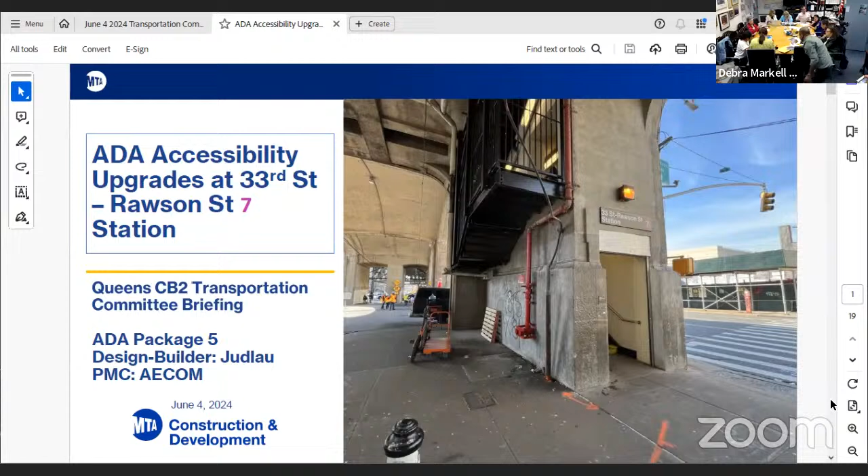I'm going to hand it over to Connor. Oh, she'll begin. Oh yeah, we also have paper copies, because we are anticipating. Just in case there is a question. You should be able to magnify your screen. There's a couple more than here. I need some. Sorry, one moment, thank you.

Oh, so now it's really okay. I gotta share it again. Yeah, no, I know, we're having some technical issue. The sharing works fine, it's the computer. I don't know if that's to do with AT&T, but AT&T just went down. Okay, great, so we'll just see. You can minimize the side window if you want. No, that's a little not flat, yeah. That's not me. Oh, that's us. Yeah, that's our sign. Oh, you can move this one? Yes, up a little bit. Yeah, yeah.

Okay, so my notes are pulling up, but I will just begin. So hello again, thank you so much for your time. Again, my name is Connor Irvin. I'm representing MTA Construction Development. I'm here with Megan and of course folks from our PMC. So thank you, we're presenting two stations here.

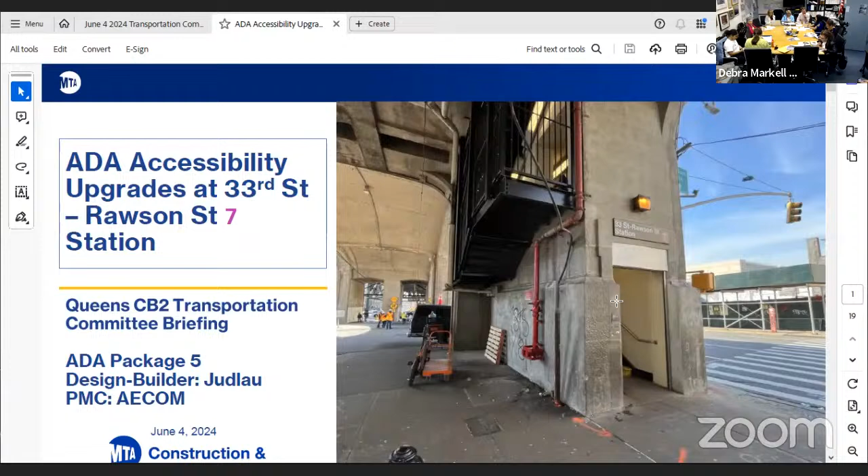Okay, great. So to dive into the project scope here. So for ADA improvements, we have a number of them.

We have 2 new street to platform elevators serving both sides, Manhattan and Flushing bound. 2 new street to platform stairs, again in both directions. 4 mezzanine stair replacements in both directions. And we have a new ADA raised boarding area on each platform, as well as a new platform edge tactile strips along the length.

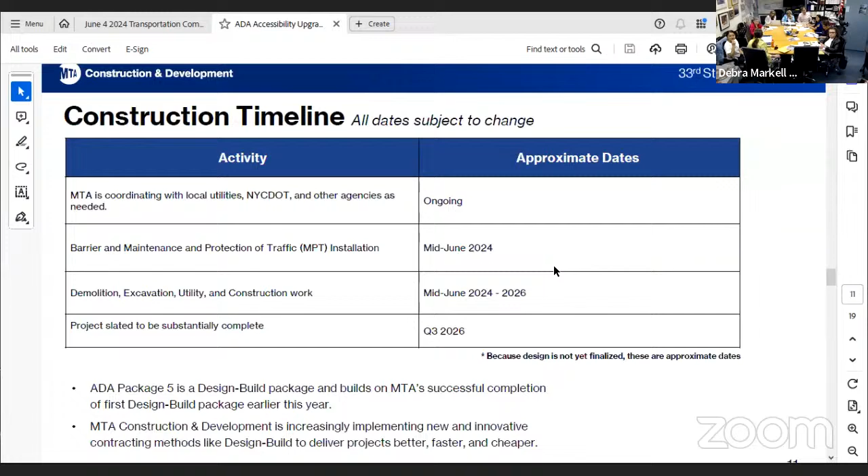So for infrastructure improvements, we have 2 new street level head houses. Those will include new fare control areas that will lead from the street up into the platform. We are also extending the platform canopy. So in order to make room for the elevators, we're going to be... stop sharing.

We anticipated this problem though, so don't even worry about it. Yes, Maureen, thanks for joining. Don't worry, I'll keep going if everyone has anything, we'll put it in the chat.

No, we're on the scope now. It's ahead a lot, we're on the first page. Okay, great. I'm waiting, I haven't... okay, come on.

To make room for these elevators, we're going to slightly extend the platform, so that will also include an extension over that area. Also going to be improving lighting in the station and some fire alarm upgrades.

And whenever we make improvements like this, we usually also touch the back of house space. So we're going to be making some HVAC upgrades to the back of house area where our employees sit.

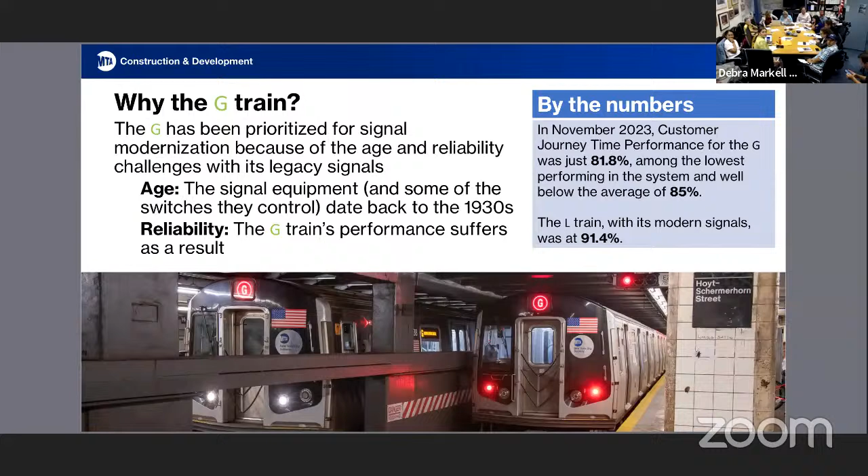So why the G train? These signals are from the 1930s, really, really old, from the FDR administration. They're really beginning to show their age, as train riders know. We've completed CBTC on the 7 and the L, and that dramatically increased their on-time performance. We're really excited about bringing the same benefits to the G. Yep, thanks.

So the scope is along the entire 11.4 mile line. It's a really big project made up of a lot of complex moving parts. As we're installing the signal equipment, we're making the service outages as well, and we're replacing a very, very large amount of track, 30 miles of track. We're also upgrading the big switches, which allow the trains to move from one track to the other.

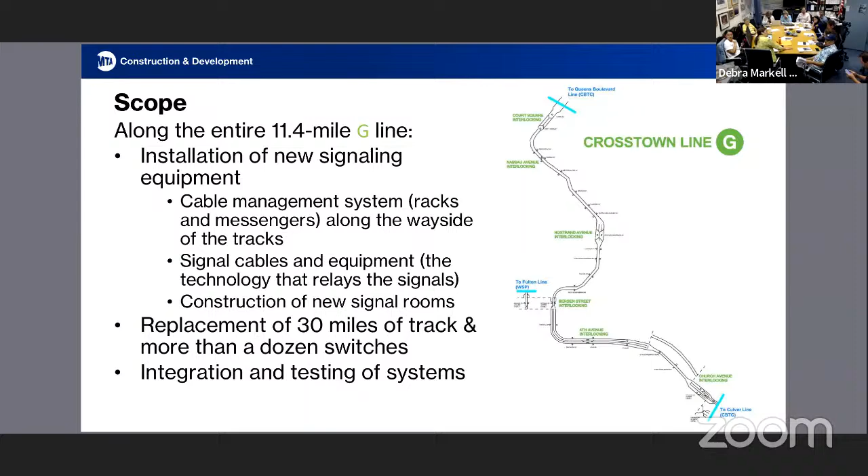So as I said, when we were talking about the ADA projects, this is a design build project. This really symbolizes not just the way of modernizing our physical infrastructure, but how we're executing these projects better, faster, cheaper. This is our very first design build CBTC contract, and again, it brings on the builder earlier in the process. It's helped us reduce back of house space and rely less on equipment installed directly on the tracks, which also makes it easier to maintain and cheaper to build.

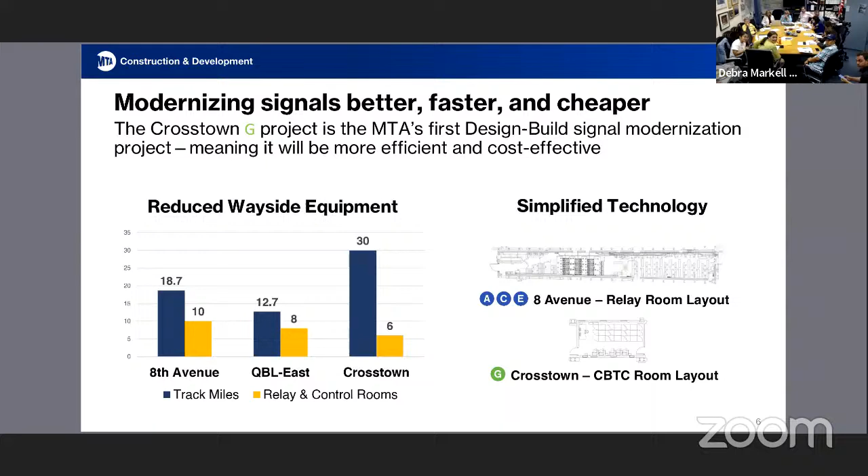So this work does require service outages. It's a very complicated project. We're working directly on the tracks, replacing these big knuckle switches. You can't do it in pieces, which is why we require these long-term outages rather than the weekend outages that everyone along the G is accustomed to.

Another challenge is that by installing the new switches that are compatible with the new technology, we actually have to change the geometry and layout of the tracks themselves. So there will be weekends during these 24/7 outages where we are completely demoing the entire concrete foundation and relaying the track, like brand new track, and reconfiguring the turns and everything. So unfortunately we can't run service at the same time.

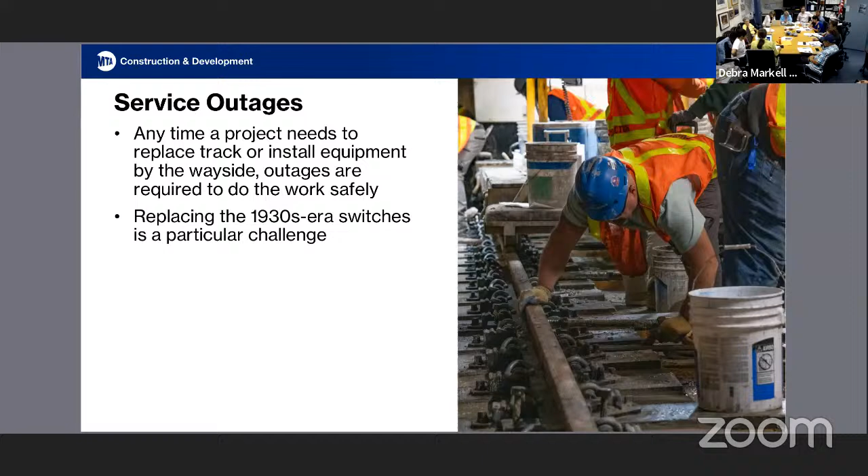But by our calculations, it is much more efficient, cost-effective, and convenient to customers in many ways to do this long-term service outage than to do at least 40+ weekends of outage. And really, you couldn't even run very good service if you theoretically tried to do this over the weekends—it'd be bare bones. I think it would cost over $10 million more just to extend the project. So this is a much more efficient way.

Similar to ADA projects, this is just MTA Construction and Development's joint venture with New York City Transit. But when we do have these long-term service outages, we do our best to stack those benefits so that when customers return to the stations, it's just an improved station environment. They get better lighting, etc.

New York City Transit has dubbed that renovations—that's their phrase for basically repainting, fixing tiles, power washing, which every station does get anyway every 30 days. But we're going to be cleaning every impacted station, and we're also going to be doing at least 5 renovations along the G line, and hopefully more to come. We're just going to see how we can put those in.

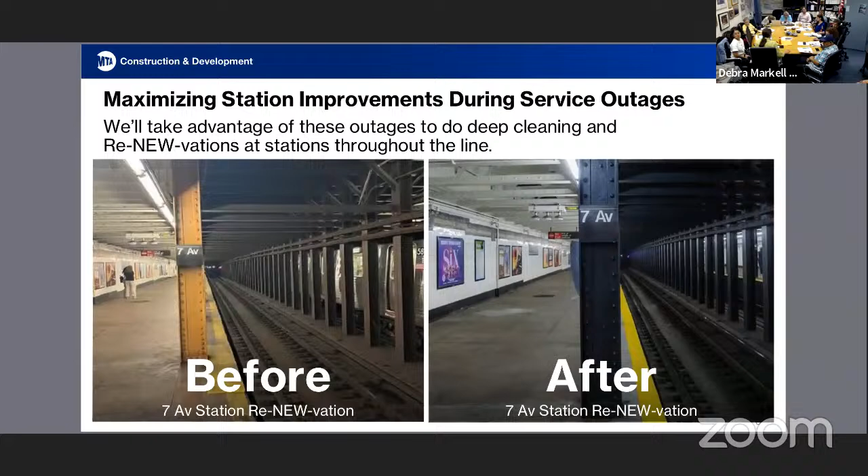So some customer impacts—we know there's going to be some service outages here. We are currently in the phase of overnight shutdowns. So if we try to take the G, I think past 9:45, it's been out in certain areas of the line. That's really just to do preparation for this 24/7 outage that we have coming on in late June.

Okay, great. So how are we going to be replacing this service? We know that we need to be transparent, and this is a huge project—it is going to have inconvenience to customers during the 6 weeks of outage. But we have a really robust shuttle program that we are very confident in executing, and we've worked very closely with DOT to make this as successful and expedient as possible. So we have a small army of over 100 shuttle buses ready to go when the 24/7 shutdown comes.

It's going to be separated into 3 phases. This neighborhood, I think, will be impacted by 2 of them. But we'll have shuttles running as frequently as every minute during rush hours, and then actually much more quickly and frequently than the G train does during weekends and at nights as well.

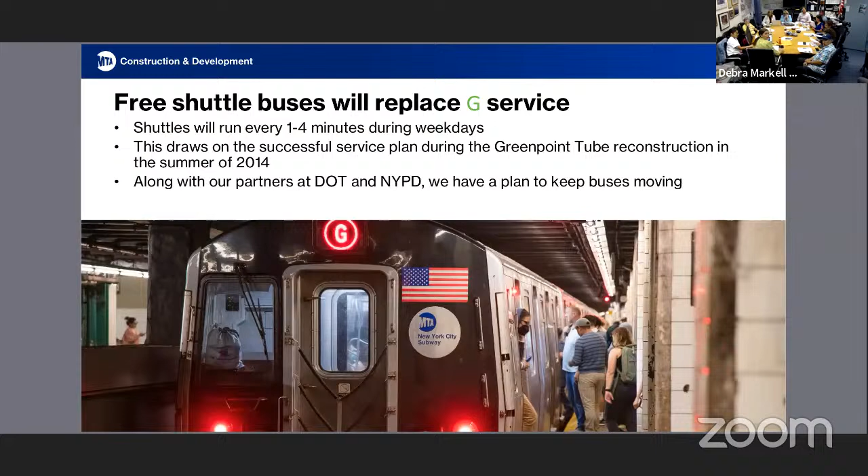This really draws on a similar plan that we did after Sandy, when we had to make big repairs in the Greenpoint Tube. We're not expecting anyone to sing our praises with these shuttle buses—we know they're obviously less popular than subway service. But we did get a lot of feedback from Greenpoint residents and folks affected by that northern part of the G, saying they loved the shuttles because they came a lot more frequently than the train itself. Of course, when CBTC is done, it will come much faster, it'll be a smoother ride, and it will just be an overall huge improvement. I think this is the biggest improvement that the MTA has made on the G to date.

Okay, great, 24/7 shutdown—I think this is the newer part. So this is phase 1, starting on June 28th until July 5th. This first phase affects this area, so there will be no G service between Court Square and Nassau Ave.

There will be a free shuttle bus operating between Court Square and Nassau. G service will remain active between Church Ave and Nassau, and there's going to be free out-of-system transfers. And the JZ—we're going to be running local so that those transfers will be much faster, and there's going to be more of them. So we won't be running express.

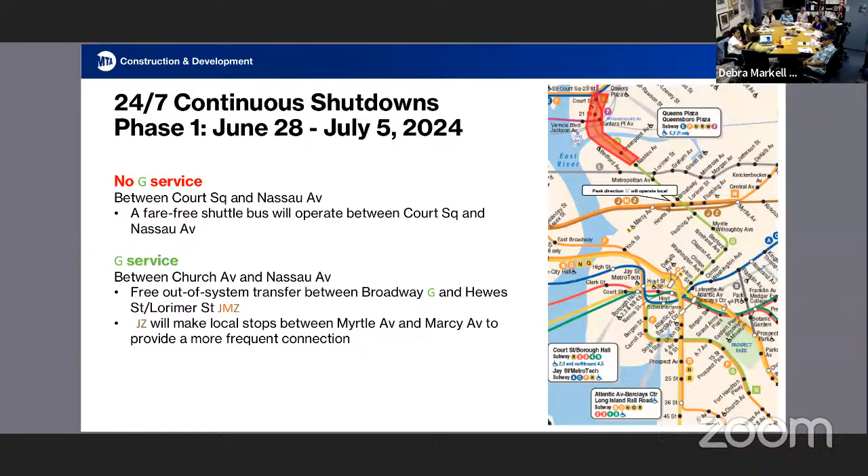Okay, so now we're going to be looking at the maps of the shuttle bus replacement service. We've broken it up into northbound and southbound.

Northbound, we're going to be running buses again from Court Square to Nassau. There's going to be 5 stops, and for the convenience and familiarity of riders, these stops are going to be right in front of the stations themselves. That map might not do a good job of showing it, but we wanted to make sure it's easiest for people to catch those connections.

We will have adequate signage. I take a shuttle bus along Eastern Parkway a lot, and we have those big signs in the station that we'll be taping. We have tape ones that we're preparing for station agents to give to folks in the weeks leading up. I think we're almost done with that, and we're also going to be doing in-station announcements.

I also really encourage people to sign up for the G alert. If you have a smartphone, or you can sign up with email alerts, you can get those real-time updates too. So we'll go to southbound.

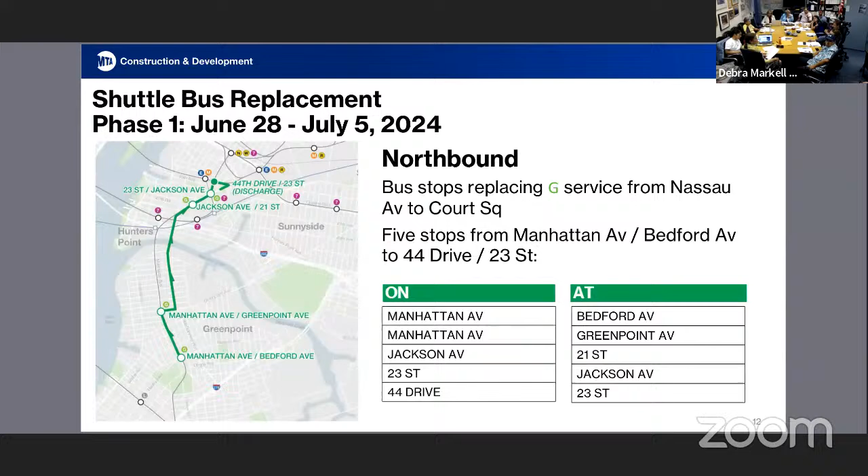The one key difference on southbound is from northern constituents, we did get some feedback. So southbound buses will be turning on Freeman from McGuinness Boulevard, which means they'll make a northern stop, actually on India Street, for folks using the Greenpoint Ave stop, so they don't have to. I think we're supplementing it with that stop.

A lot of this has been very, very complicated with traffic patterns. Again, really working hand in hand with DOT to coordinate different turn patterns, and we'll get into some of the other mitigations we're implementing to make this as successful as possible.

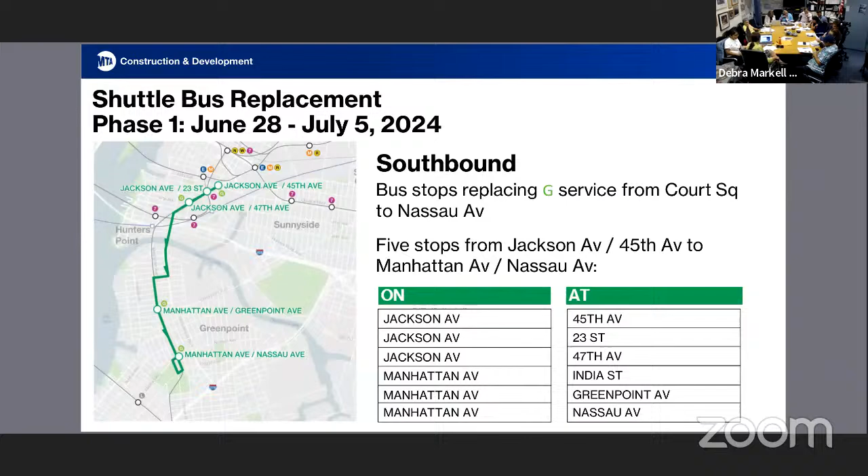So we'll go to phase 2 now. This is a more impactful set of stations. Again, no G service between Court Square and Bedford Nostrand. We're running that fare-free shuttle bus during that time. And the J/Z will make local stops between Myrtle and Marcy Ave to provide that more frequent connection. G service will be running from Church Ave up to Bedford Nostrand.

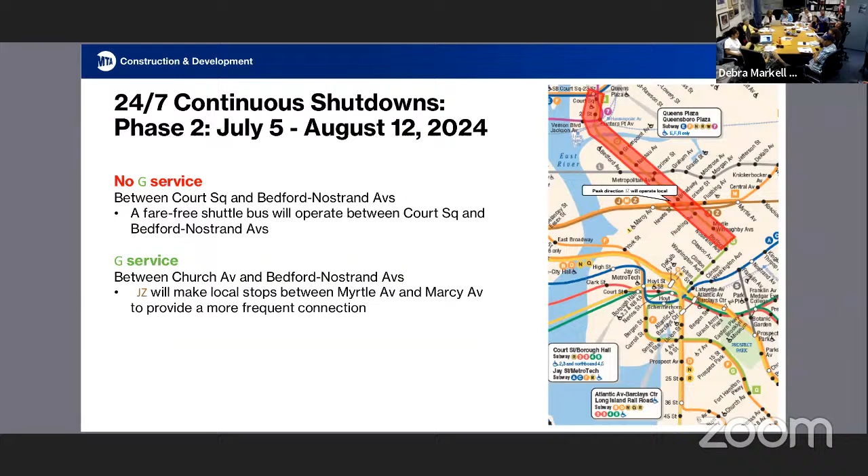For each phase, we have our shuttle bus replacement route. Northbound: similar, it extends down to Union, so it's just an extension of phase one, and terminates at Bedford Nostrand.

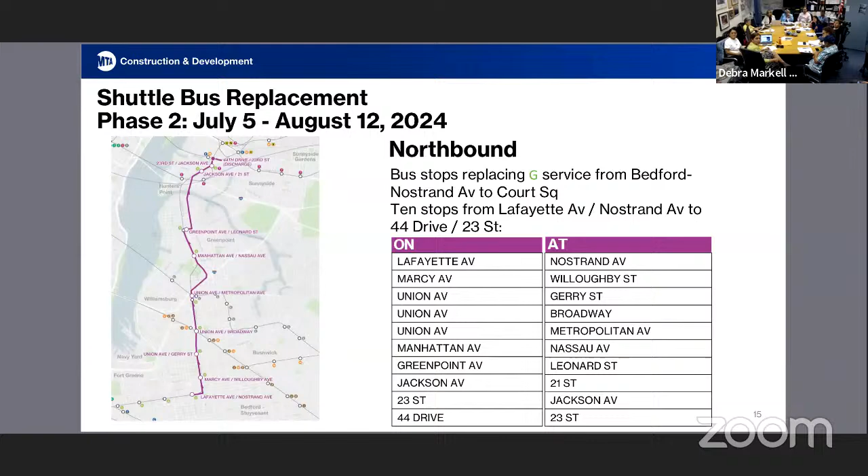And the southbound: in that area, we still have that India Street stop that we've added, same as the first phase, so it's just an extension. Okay, next slide.

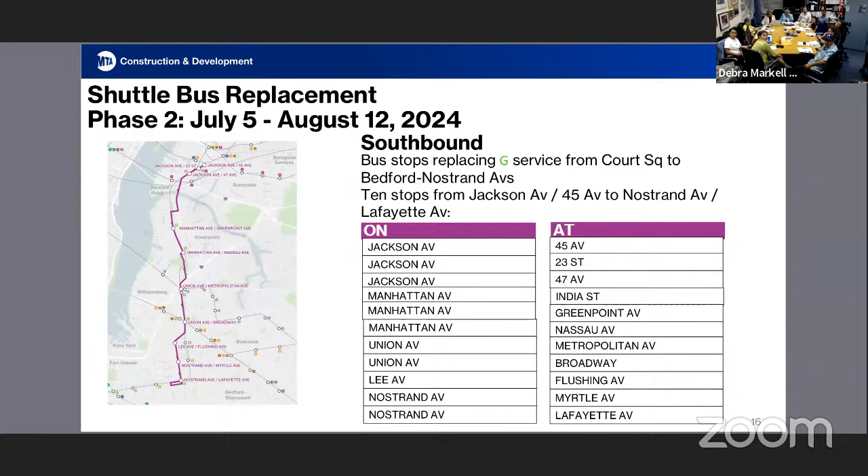This is our third and final phase, phase three. You all aren't impacted by this one necessarily, so that's great news for you. The G service will still be maintained between Court Square and Bedford Nostrand, so those sections will be completed by phase three, which starts August 12th. Service will be out between Bedford Nostrand and Church Ave, but that part is a little less impacted because the F will also be running.

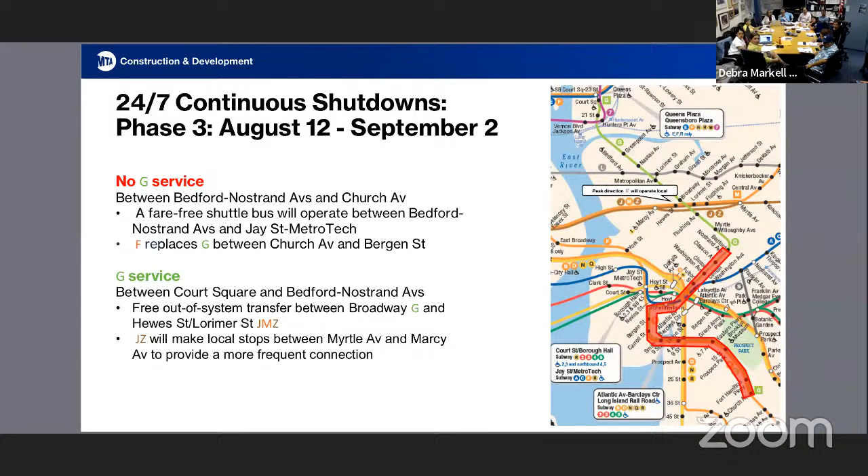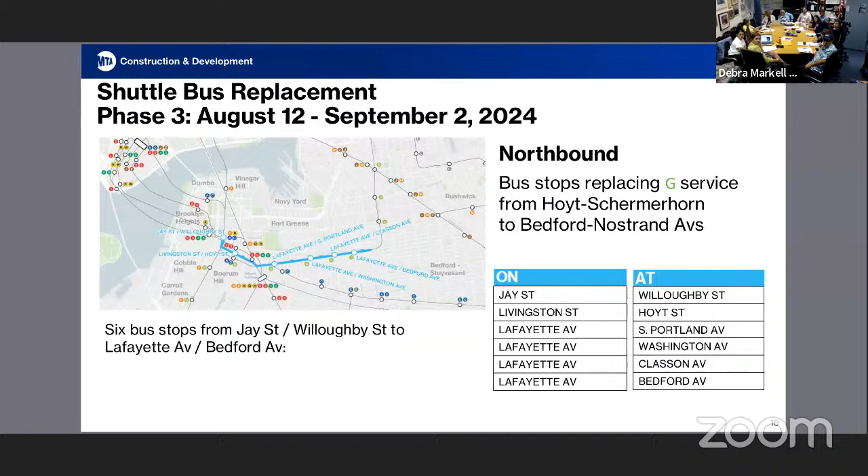We'll go through these slides: northbound, and southbound. Oh, and another thing I forgot to mention - in phase three, we are running it to Jay Street MetroTech so folks can get that transfer to the A/C easier. Okay, next one.

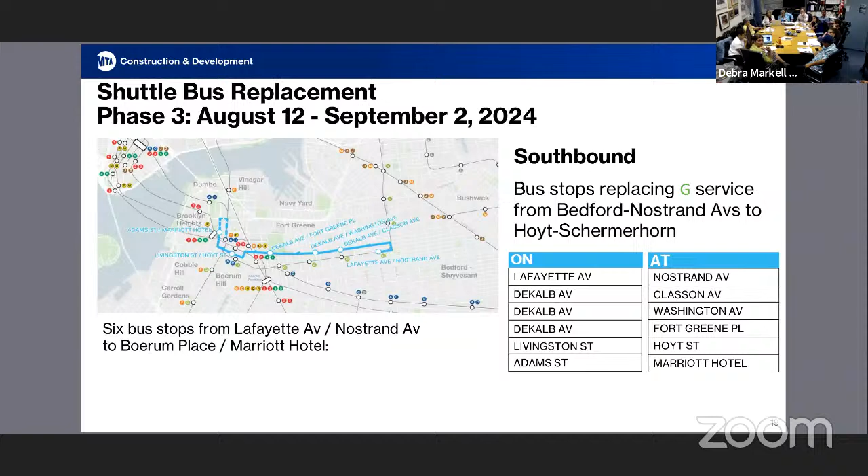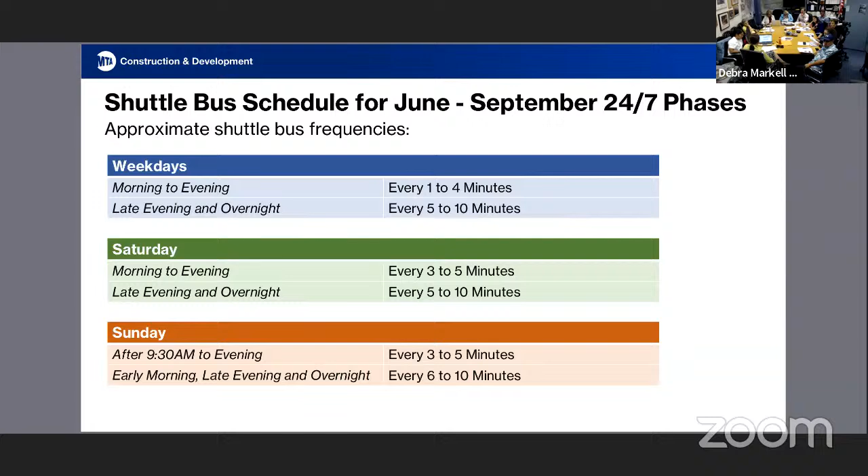Again, like I said, we have a very large amount of shuttle buses dedicated to replace the service. We're also staging this project during the summer on purpose, since ridership tends to be lower, school is out, and street traffic tends to be 10 to 15% lower during the summer. So this was planned to mesh with that.

It's so fortuitous that we have someone from DOT here because I wasn't able to get anyone else from DOT to come. I know you might not have come to this project, but...

We know that the buses are really only as effective if we can keep them moving frequently. So we've been looking at the right tools to get people where they need to go and keep these buses moving on time. We have some basic nuts and bolts tools: we're clearing curb space, so when we have these new stops, we're doing some daylighting, just clearing the area to help buses make turns. Also in phase three, we're having some temporary bus lanes as well, so the curb sets will be temporary busways.

We have some turn restrictions, we'll just flick through really quickly. Mostly the turn restrictions are primarily focused on Manhattan Avenue. So if you are taking the G to Williamsburg, unless you're driving there, that won't really affect you. But that's where the turn restrictions are, just to reduce traffic volume along Manhattan Ave, because we know that's a really congested street.

We are implementing loading zones, and by we, I really mean DOT, because they're going to be really helpful partners on this to make this as successful as possible.

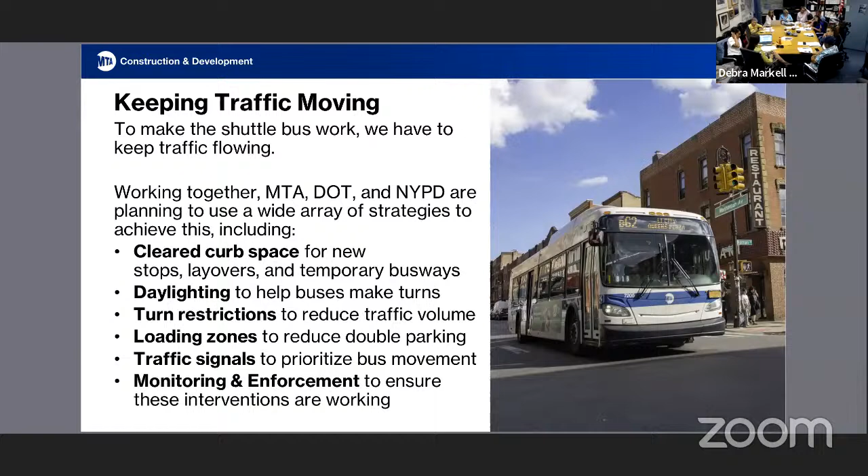So turn restrictions, again, this is really just nitty gritty for North Brooklyn. We had a town hall a few days ago, so we can gloss over that.

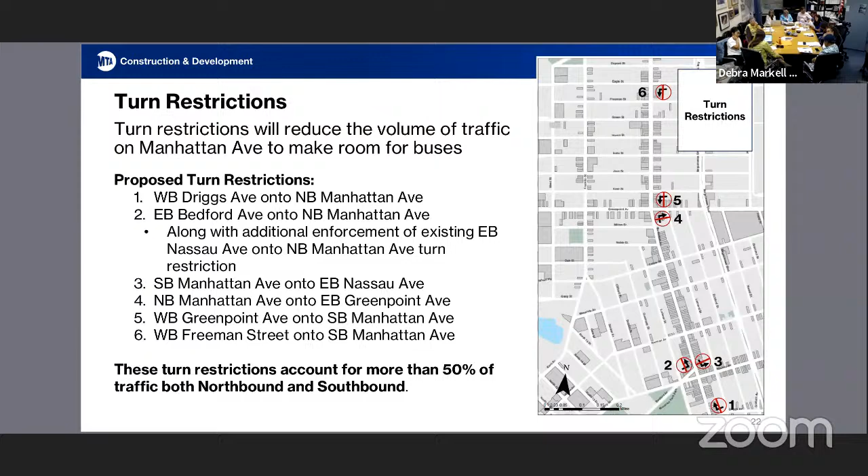Those are their slides, right?

These are the queue jump signals. I don't know if you know a lot about these, but when I usually present this, we have our partners at DOT and they can explain more of the technical ways that they do some of these traffic signal modifications, but I think the gist of it is that it helps prioritize bus movement and bus turning.

And then, I mean, I can— oh yeah, please. I mean, yeah, a lot of this is in Brooklyn, and I'm in the Queens office, but yeah.

Queue jumps are essentially— you've seen, we do have a few around Queens. Queue jumps are an additional signal at the intersection. Usually it's for if we have a very short curbside bus lane or a bus stop at the corner; it allows the buses to kind of jump around the queue and get a head start. It's no more than about 5 seconds that the bus gets to go first, and then after that the intersection turns green, letting everyone else go.

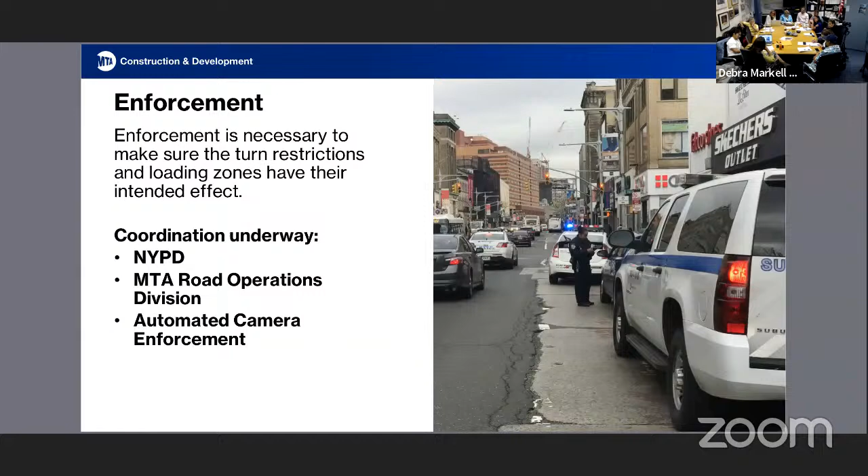Great, so we're getting to the final slides.

So we just want to let you know, when we do know much farther down the road after the CBTC 6-week portion has been completed, when there's going to be more outages, we'll make everyone aware of those. And we have, of course, our wonderful GCR rep Megan who will communicate that for us.

In summary, it's a very complicated project, but we feel very confident in our ability to execute not just the construction on time. We are all hands on deck within MTA, I can tell you that for sure.

We have named, dubbed a G-Train czar. So we have someone who is dedicated to making this project a success, similar to a project CEO, which we're actually implementing on a lot of projects. That's a new management strategy we're using in a lot of C&D projects, just to keep accountability centralized in one area, so we don't have different contractors competing for the same resources. So that is a dedicated person to oversee all operations.

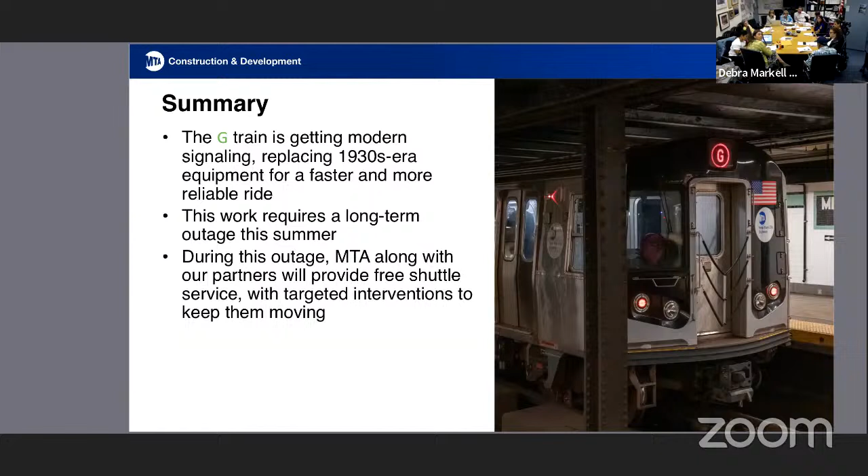There'll still be a turnaround from south to north - you can actually see the turning road. In that handout it's really tiny, but you can see the turning point. I'll email it around so you can see. I can ask if there's going to be more buses at Court Square - I thought maybe because it's a terminus they would have buses just waiting for people to come on. We've done that elsewhere, like with shuttle bus operations for Queensboro Plaza - the buses are generally there waiting, ready to go.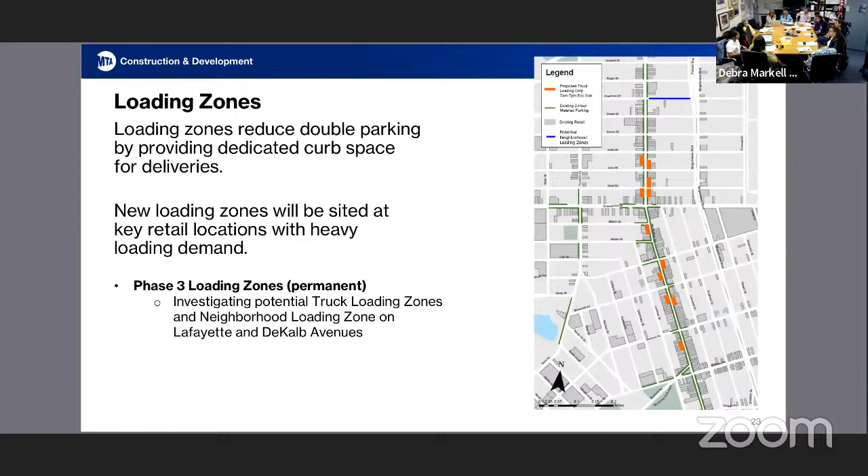So it should be the same order of operations, and there's always going to be people on site to make sure things are running smoothly. In the very beginning it's going to be a flood of people in safety vests, helping with wayfinding and making sure bus operators have support, and customers know where to go.

I will say the signage for the shuttle operations was excellent. Wish the buses had bus lanes to move faster. Yeah, we learned from that to make sure it's implemented in a similar fashion - thank you for that.